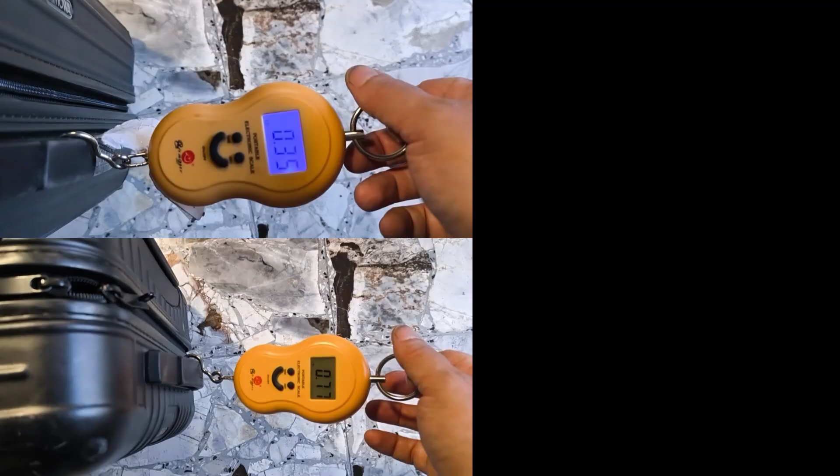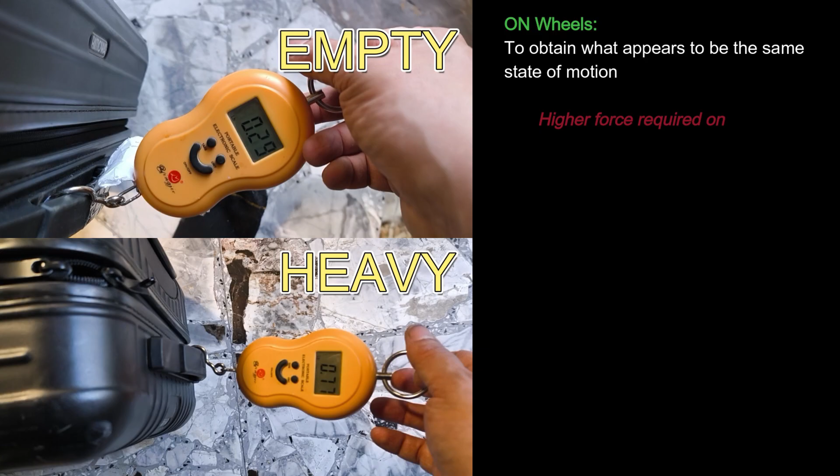But let's get some numbers. I have measured the force I have to apply in order to produce movement. You see that when the bag is on the wheels, in order to produce something that appears to be the same acceleration, the same movement, I have to apply more than twice as much effort. Because, as we previously would say, that is one of the fundamental Newton's laws: the force equals mass times acceleration. So if I want to have a similar acceleration, by increasing the mass, I have to increase the force that is applied to the body.

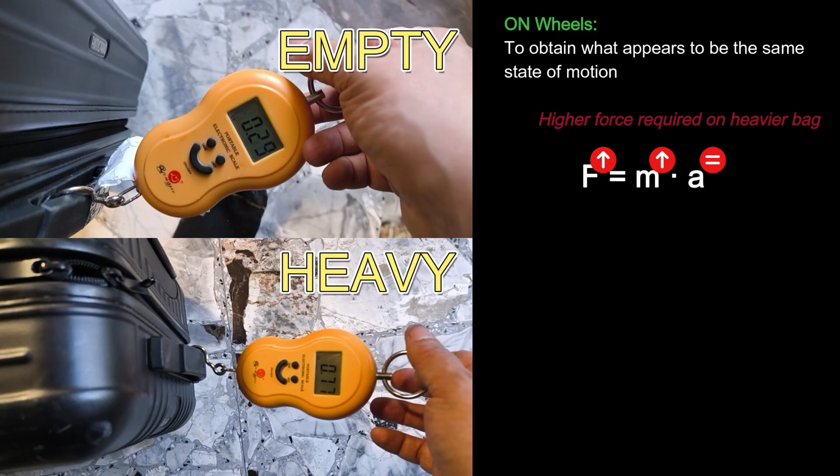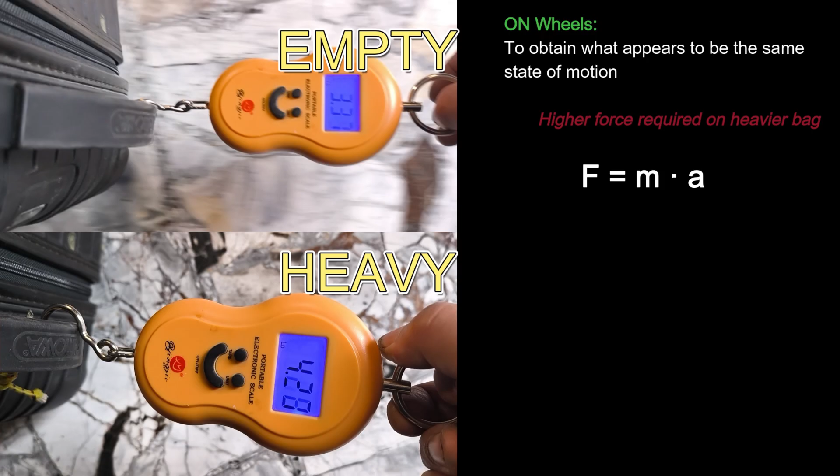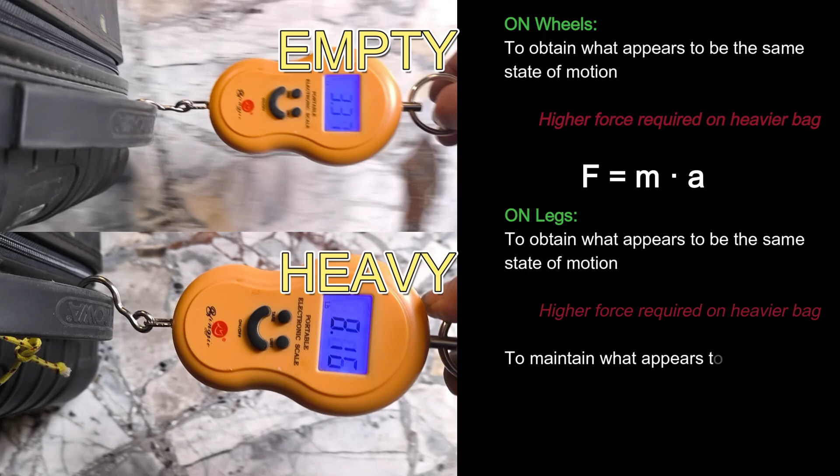Now, in order to maintain the state of motion of this bag, look at what happened. If I would release the bag, of course it would stop immediately. So in order to maintain a state of motion, you see that on the light bag, the empty bag, I was applying something like 500 grams of force, while on the heavy bag I was applying a force in the range of 3.53 kilograms. So we can say that still I do require a force to produce the movement, but this force is not exactly the same as the force that I required in order to start the movement of the bag.

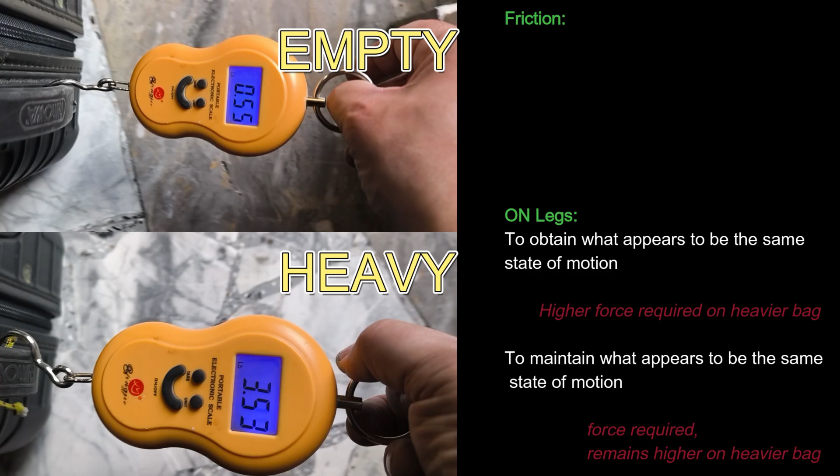So the facts are exactly this: I need a higher force to start movement, and I need a continued force, lighter, to maintain the movement of the sliding object. And the equation of the frictional force is: frictional force equals the normal force multiplied by the coefficient of friction.

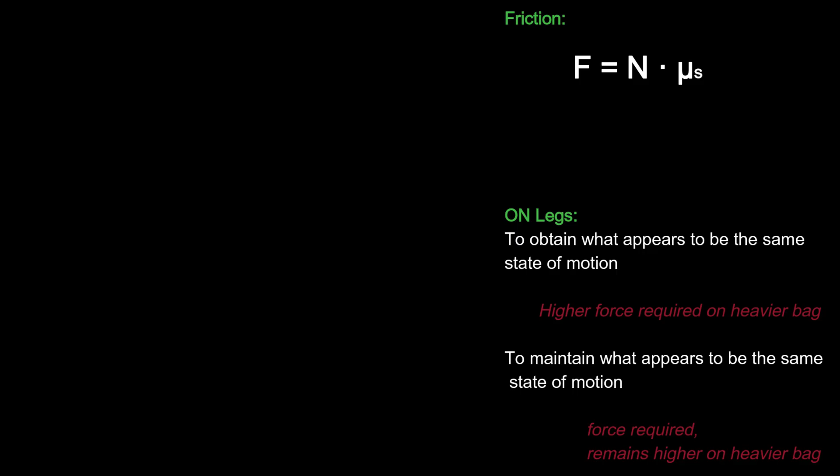To understand this phenomena, we have to discuss the inclined plane. If I have a surface with a small slope and I put my bag on it, my bag will not fall down, you would say. But if I tell you the slope is very high, will the bag fall down? You would say yes, obviously it will.

Now, what are the physical forces that decide whether this bag should fall down or not? Well, when I have an object, my bag, resting on the surface, I have only the force of gravity applied to this object. But this force of gravity can be divided into components, one which is parallel to the slope and the other which is 90 degrees with the slope. Obviously, if the one which is 90 degrees is too big, because the object is too heavy, the surface will break down and the object, my bag, will fall down underneath the inclined plane.

But if the surface of the inclined plane is hard enough to support the weight of my bag, or at least that component of the weight, there will be a normal force. The normal force is equal and opposite to the component of the gravitational force which is pushing my bag towards the center of the earth. The remaining part of the weight of the bag, which is parallel to the inclined plane, is the force that will produce the movement of the bag.

But however, my bag eventually will not move because of frictional forces. This frictional force is nothing else than a force which is connected to the normal force. So existence of frictional force is only conditional to the existence of the normal force. And the equation that regulates this connection is that the frictional force is equal to the normal force multiplied by the coefficient of friction. Ladies and gentlemen, we are talking of your friend: the braking action.

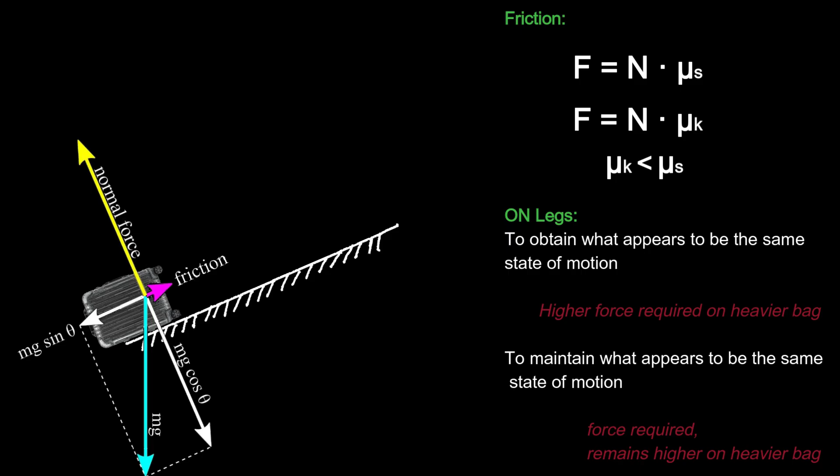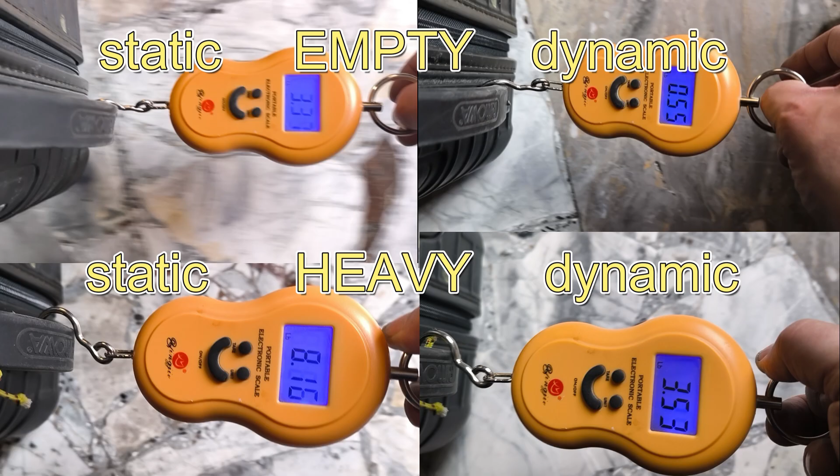Here's what we have on my video. If we look back at the numbers I recorded, you'll see that once the bag was empty, the force required to start the movement was in the range of 3 kilograms to start sliding, and I just needed something like 500 grams to keep it sliding. When the bag was full of books, I needed up to 8 kilograms to start the motion, and I still needed 3.5 kilograms to keep the motion. Now, this is not really a scientific way of doing a measurement, I know it well, but I was trying to give some kind of number to a physical phenomenon that we know very well.

We've all been displacing a very heavy bag and a very light bag. We've all tried to move a piece of furniture knowing that if you start moving it, once you start moving, then it's easier to keep it moving.

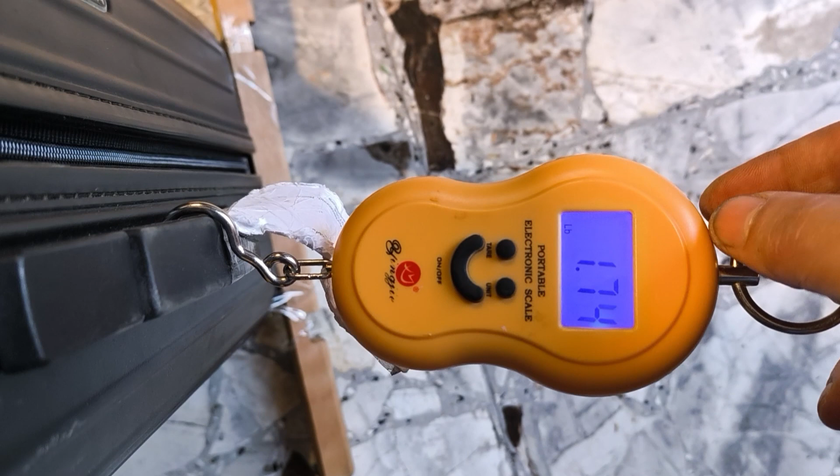But bear with me one more second because I want to do a last test. In this example, I have locked the wheels of my bag, but not in a way that they can't spin. They're free to spin, but they can't twist or turn on themselves. What I observe is that if I try to make the bag slide on the side of the wheel, not in its longitudinal direction, the effort needed to make the bag move is similar to the effort needed when the bag is on its leg. And to keep the motion, again, I need to apply a force similar to the one needed when the bag is on this leg.

So in a few words, I'm demonstrating something which, again, is absolutely obvious. I have a wheel, and this wheel is designed to work in its longitudinal way, in this direction. But if I take this wheel and try to use it in this other direction, obviously this becomes a sliding object. If you think about it, a wheel sliding this way, rather than rolling, is nothing different than the leg of a piece of furniture being pushed in one direction or the other. Now, the piece of furniture will always have a dynamic friction coefficient, and the wheel sliding on the side will have a dynamic friction coefficient.

What's interesting to note is that if the wheel is rolling properly, every single point of the wheel remains in contact with the surface in a static way. So the surface of the rubber remains in static contact with the tarmac, meaning that when the wheel is used as it should be, there is static friction between the wheel and the surface. And I just told you that the coefficient of static friction is significantly higher than the coefficient of dynamic friction.

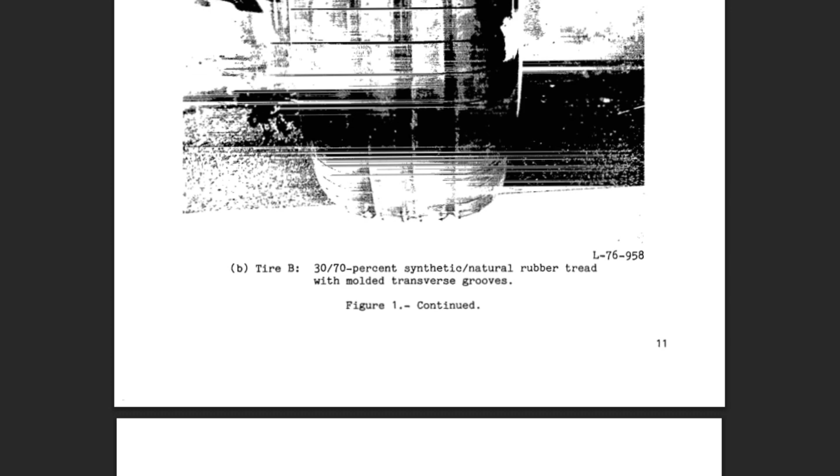In this study, we can see that there were frictional forces measured for several types of tire on several surfaces, and this one, as pilots, we know very well, the braking action is changing noticeably if the runway is wet, contaminated, dry, and so on. So that's not the news.

But what is interesting is that it was found that frictional forces was changing with speed. So at 100 knots, I got less frictional forces than at low speed, and it was changing with tire pressure, temperature, a high number of environmental factors, not only the type of tire and tarmac.

So it was also found, there was a measurement basically for the static frictional force, so the rolling tire, the kinetic frictional force for the blocked tire, and it was also measured the frictional force in case of cornering, where the tire has an angle with the motion of the vehicle, and this will be the case when the vehicle is turning. So instead of the tire rolling this way, the tire is rolling, but with an angle, moving in this direction while rolling.

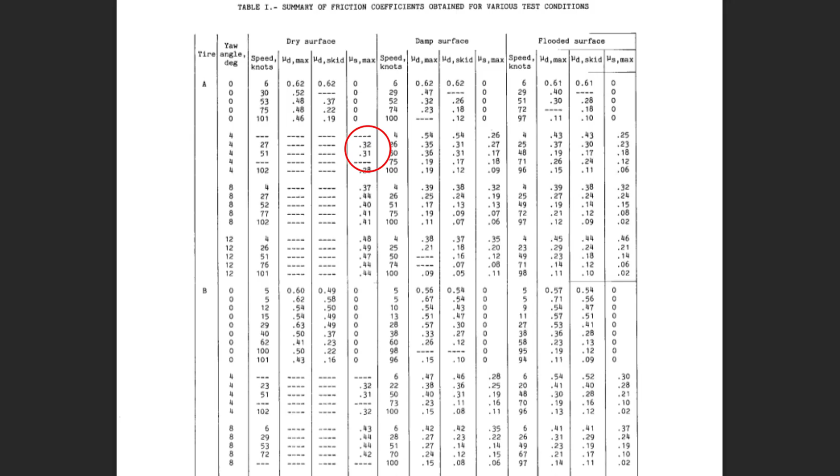And they also measured the sideway frictional forces. Now what was found is that yes, in some cases the frictional force for a blocked tire is the same as a rolling tire. The frictional forces for cornering tires are typically a bit less, meaning the tire is less prone to transmit sideways efforts, but this one I would say again is pretty obvious. The tire is designed to work in the longitudinal direction, not in the side direction, so this is not a big change.

And the final conclusion is that the frictional coefficient is an extremely variable number. In fact, when we talk about braking action, actually we talk about a runway assessment, a set of friction coefficients, not just one friction coefficient. To understand why, anyway there is a massive difference between a kinetic friction coefficient and a static friction coefficient, however, we have to define what is the traction circle.

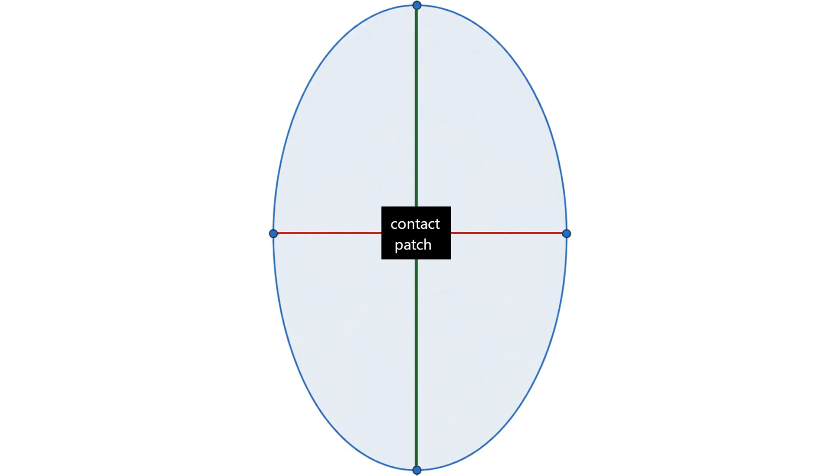If we take a tire seen from above, the tire is applying an effort on the runway, and the runway is applying an effort to the aircraft which corresponds to what the pilot wanted. For example, decelerating, if I want to brake, well, the energy of the aircraft is transferred to the tarmac, and the tarmac is transferring energy to the aircraft by decelerating it.

The tire seen from above, we know that the tire force has a limit. If I exceed the maximum limit, the frictional force will be too small, and then the tire starts skidding. So I can define the traction circle as the area where the combination of cornering force and longitudinal force will produce a tire force which falls within an acceptable frictional force.

We, as pilots, need to define those two forces. Why? Because the longitudinal force is the braking of the wheel. The cornering force could be on the nose wheel, the steering. So I'm steering the wheel, producing intentionally a cornering force in order to make the aircraft turn. Or it could be simply that I'm landing in a crosswind.

Once I am on the ground, well, the wheel will have to sustain some side forces because the wind is pushing the aircraft downwind of the runway. I will counteract these with the rudder, but the rudder will actually use the main gear as a pivot point in order to keep the aircraft aligned with the runway. So for this reason, the wind is going to be pushing, producing a cornering force.

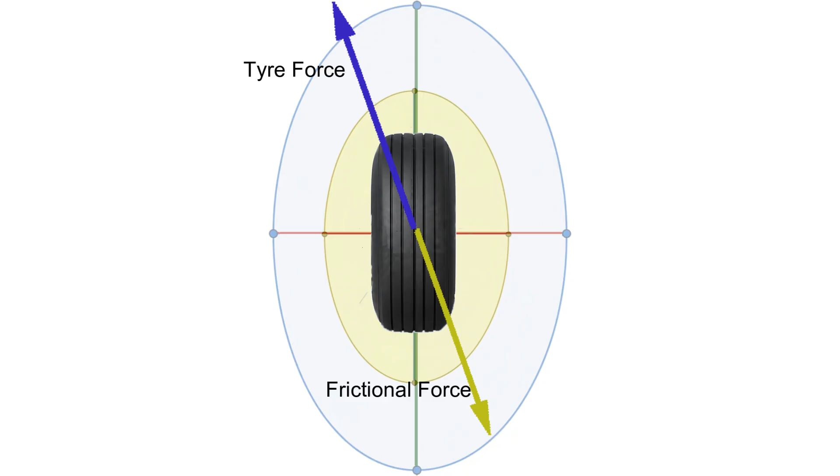Now, what happens if the tire force is too large? As I just said, what happens if my bag is on a slope which is too high? Well, it starts sliding. So we move from static frictional coefficient to dynamic or kinetic frictional coefficient, and the wheel starts skidding.

Now, the big difference of a skidding wheel is that a wheel that spins can produce a force longitudinally and sideways. The sideways, the cornering force, can produce, for example, on a car, the turn. So on the nose wheel, steering can produce the aircraft to turn.

If you take the leg of a table and start sliding it, all that the kinetic friction coefficient can produce is a frictional force opposite to the direction of movement. With a sliding object, you can't control its direction using the leg of a table. The leg will not direct the table left or right if the floor is horizontal. So, once you have a kinetic friction coefficient, the wheel is skidding, and there is no difference between a skidding wheel and the leg of a table.

That's why on my bag I did the test using the wheel at 90 degrees. Again, there is no difference. If the wheel is skidding in whatever direction, it's exactly the same as the leg of a table skidding. So two objects, no matter their shape, still skid the very same way, meaning that the force produced by the tarmac on the wheel is just opposite to the direction of movement of the vehicle.

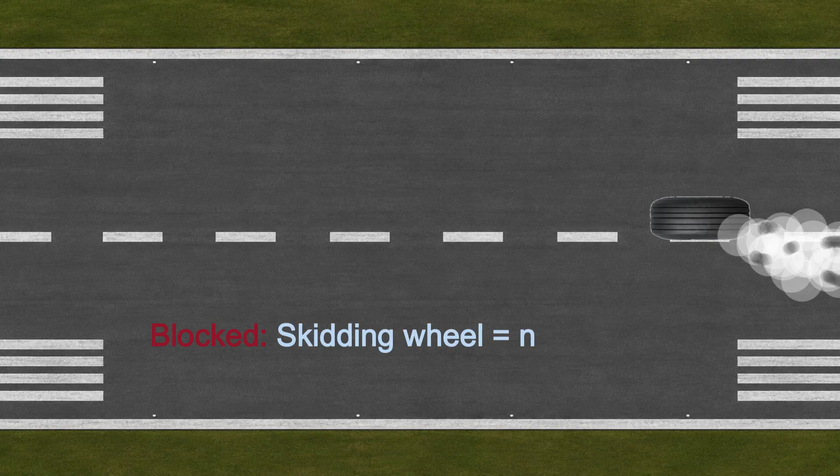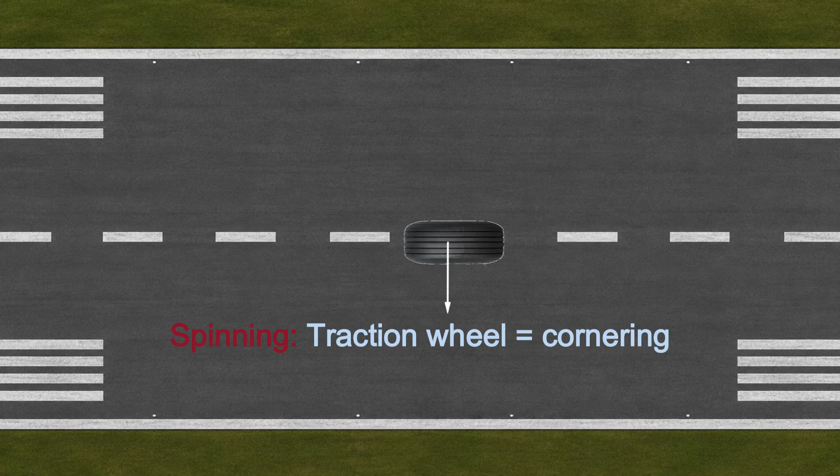Having discussed the importance of not blocking the wheels, we now get into the aeronautical anti-skid system that prevents the wheel from blocking and therefore the wheel from skidding on the ground. A skidding wheel cannot produce any cornering force and therefore cannot counteract a crosswind, causing the aircraft to skid to the side of the runway and eventually producing a sideways runway excursion, while a rolling wheel can produce cornering force and therefore keep the aircraft on the pilot's desired path.

For the maneuver of landing and rejected takeoff, the importance of speed brakes cannot be overemphasized. Why? If you think about it, when you're approaching V1, you're approaching VR. And at VR, your wings can produce enough lift to lift off your aircraft. Yes, you say I have to increase the pitch angle, so I have to increase the angle of attack. But still, some aircraft, when light, can lift off even with 2 or 3 degrees of pitch angle, so the rotation is very small, meaning the wing already produces a very high amount of lift.

And the frictional force is the friction coefficient multiplied by the normal force. Now, if your wing can lift your aircraft, the normal force is already very low, even with the 3 wheels on the ground during a rejected takeoff or during landing. For this reason, speed brakes are extremely important because they discharge the weight of the aircraft onto the wheels, and your braking capability is strictly connected with the weight, with the normal force.

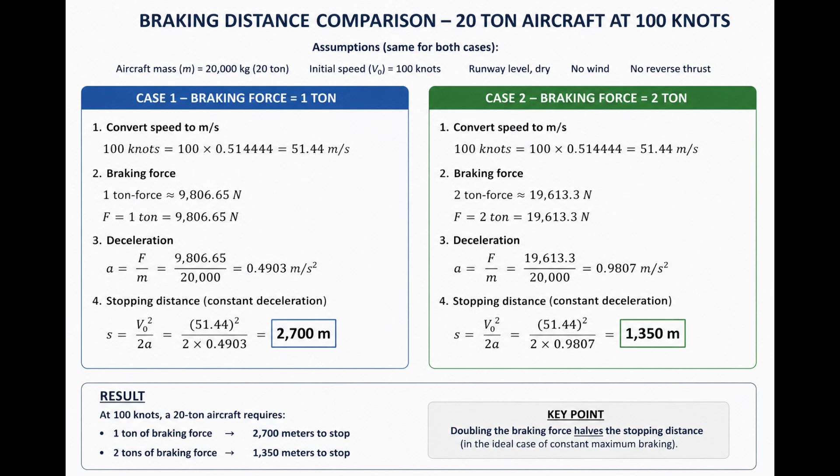Here we have the example of a 20-ton aircraft decelerating with and without speed brakes. You see that if the normal force is doubled, the stopping distance is half of it, assuming we are applying maximum braking and the anti-skid is working properly.

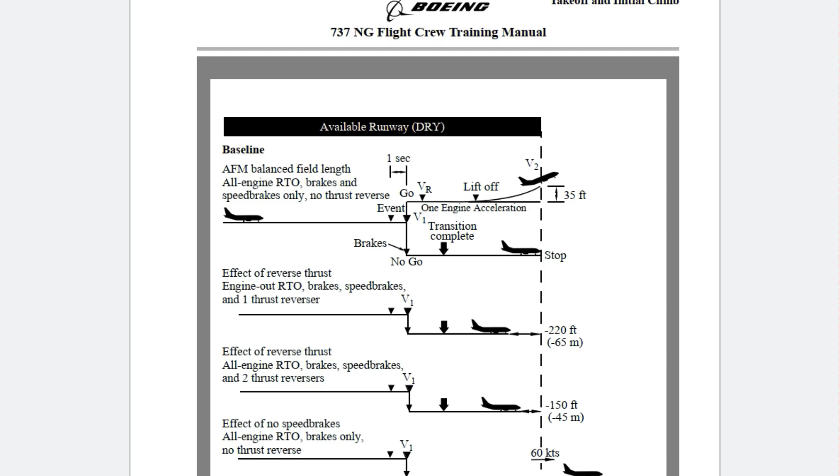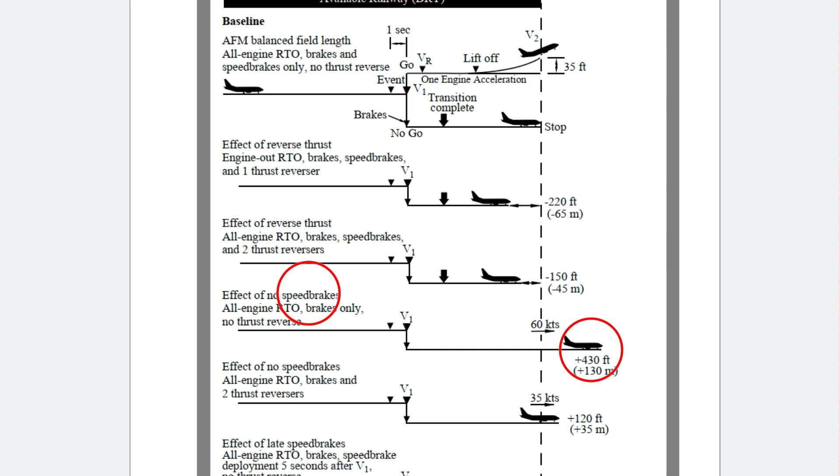In the Boeing flight crew training manual, we're not given the weight and environmental factors of the aircraft, but Boeing shows that on a rejected takeoff executed at exactly V1, if we use reverse, we reduce the certified landing distance by 65 meters. If we omit the use of speed brakes, we increase the landing distance by 130 meters, meaning that the speed brakes are more effective than reverse in decelerating the aircraft.

This wouldn't sound obvious, because you'd say reverse is a positive push in the stopping direction, whereas the speed brakes just discharge the weight of the aircraft. They increase the normal forces, and increasing the normal forces gives a greater efficiency of the brakes, enormously greater, as we saw in the previous example of the 20-ton aircraft stopping in half the distance.

At this point we can also discuss tire elasticity, and a piece of basic ATPL knowledge: the anti-skid will avoid the wheel from skidding, but will release the brake when the spinning speed of the braking wheel is something like 80 to 90 percent of the free spinning wheel.

You might ask why the anti-skid would allow a little bit of skidding of the wheel. In reality, the anti-skid is not allowing skidding. It's just allowing a lower rotation by keeping a static contact patch, so the tire and the tarmac remain in static contact. But when the wheel starts braking, a longitudinal force is applied to the wheel.

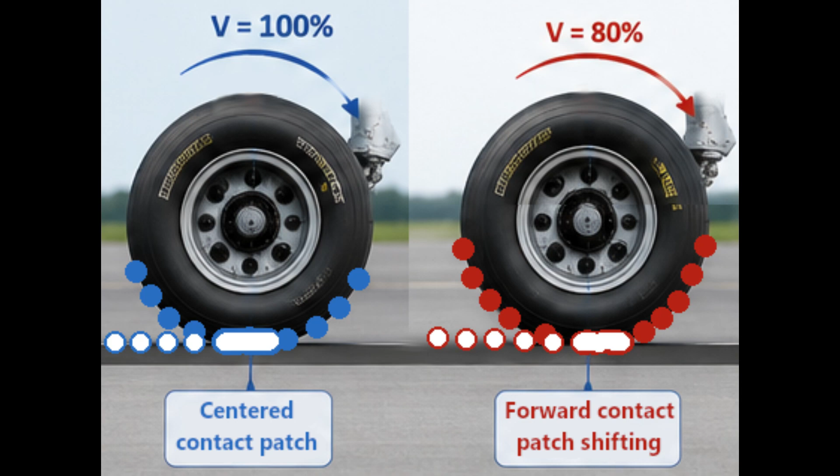So this 80 or 90 percent lower spinning speed does not correspond to the skidding of the wheel. This phenomenon also occurs sideways.

When the tire is applying a strong cornering force, the tire will deform and get an inclined shape, and the newly arriving points that come into contact with the tarmac arrive in a straight direction. Only once they are in contact with the tarmac and start transferring force do they move elastically and shift to the side.

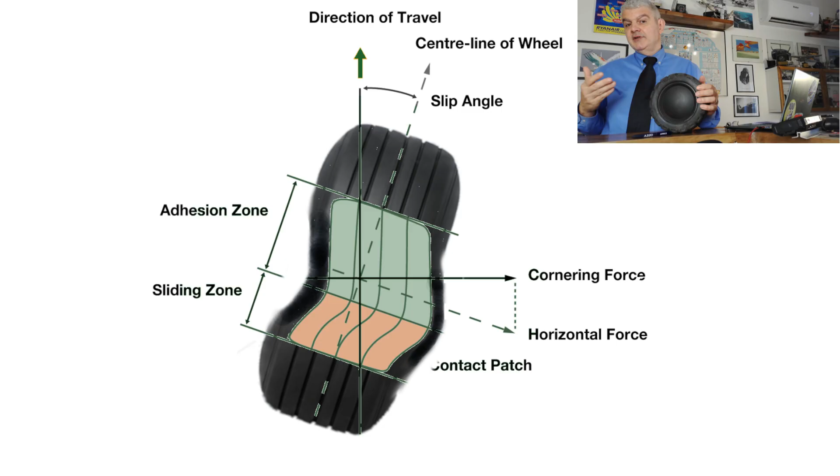So when there is a cornering force, the tire is again allowed a little bit of skidding. If the tire is turned by 20 degrees, for example, there is a little skidding and the vehicle actually turns by maybe 15 or 10 degrees. So there's a little bit of slip angle - that's what it's called in automotive terms. It's not the aircraft drift angle, but the angle between the longitudinal direction of the tire and the actual direction the tire goes when there is a cornering force, due to the effect of elastic deformation of the tire.

In conclusion, this deformation of the tire makes it normal for the anti-skid to accept a lower spinning of the wheel, and for the wheel to have a so-called wheel slip angle, meaning the vehicle will turn not exactly in the longitudinal direction of the tire, but at a slight angle compared to that direction.

Let's get now to the heart of the matter, which is the cornering force, finally. Why is it the heart of the matter? Well, what we want on landing is the longitudinal force, the braking force. So yes, we want braking, and we discussed the importance of speed brake indeed.

But when we land on contaminated runway, when we land on strong crosswind, what happens is that we are flying with a crab angle. You very well know that we should decrab the aircraft prior to landing. In some aircraft models, it is even accepted that the aircraft is decrabbed after touchdown if the runway is wet or contaminated. Both techniques are okay, and it's totally acceptable to decrab the aircraft after touchdown. The heart of the matter here is the importance of decrabbing the aircraft promptly after touchdown, or even before touchdown.

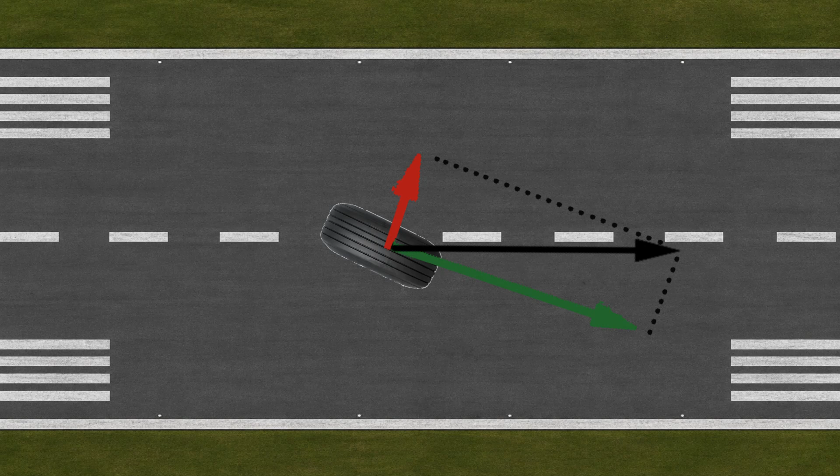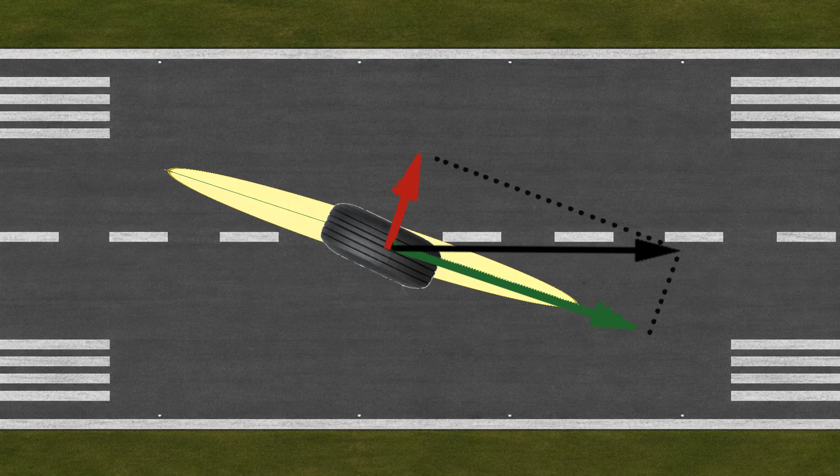Now, the longitudinal force can be very well managed by your anti-skid system. But the cornering force, there is nothing the anti-skid system can do about it. So if this cornering force is too high, your tire force will fall outside the traction circle. And when the tire force falls outside the traction circle, the result is that the traction circle shrinks to a smaller traction circle, where the friction coefficient is the dynamic, the kinetic coefficient of friction. Even worse, the cornering force is zero in skidding objects.

So if your wheel lands with a cornering force which is excessively high, what happens is that your wheel starts skidding, and there is nothing the anti-skid can do to produce braking, because the exceeding part of the tire force is not in the longitudinal direction but in the sideway direction.

And here comes the worst part. If there is no friction between your tire and the tarmac, so if your tire is skidding on the tarmac, what happens is that normally we switch from controlling the aircraft about its center of gravity—because once you are in flight, your flight controls act about the center of gravity—but once you touch down on the ground and the wheel is in positive contact with the ground, even with a small cornering force, there is static friction coefficient. Now when you move the rudder, you spin the aircraft about the point of contact with the ground. So you switch from center of gravity control to main tire controlling of the aircraft.

If the wheel is skidding, this switching doesn't occur. So it means that as soon as you try to align the fuselage to the center line, because there is no friction, the aircraft will start skidding sideways. That's exactly what happens when you are in crosswind and you remove your wind correction angle. You start drifting downwind. So as soon as you try to align your aircraft to the center of the runway, the aircraft will have a tendency to drift sideways. This drift, produced by the crosswind, could again have too high a cornering force and make it impossible for the tire to develop grip.